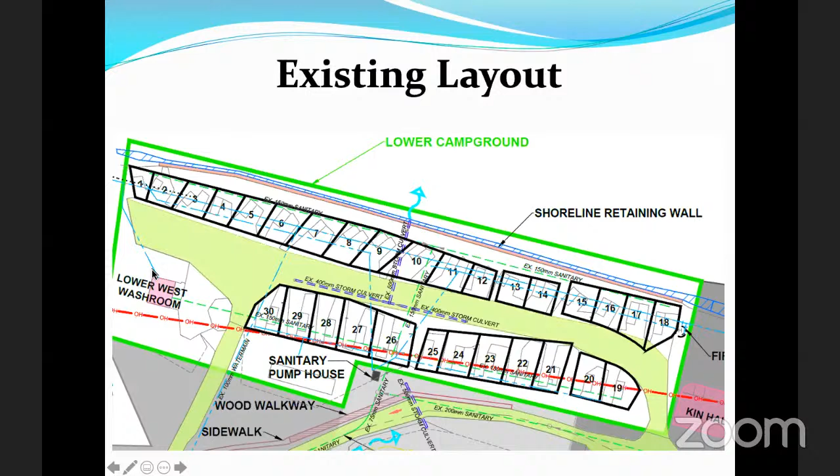I have 2 suggestions for you. One builds on the layout as recommended in the master plan study, and the other one is a far cheaper option. This is the layout recommended in the master plan update.

Derek, if you can help me out, the front row of waterfront camping has been moved back and it's shown by brown rectangles. There's 15 sites shown back. The access road, just below that, in gray asphalt, has been relocated a little to the south, thereby eliminating all but 2 sites of the back row. Derek, there's two sites on the left side there, point those out. The washroom is removed as well.

What the report does not state is any indication for the green space that is to become the area between the water and the relocated campsites. There's a considerable area to the west side, that's the left side of this slide, between the 15 new sites and the waterfront.

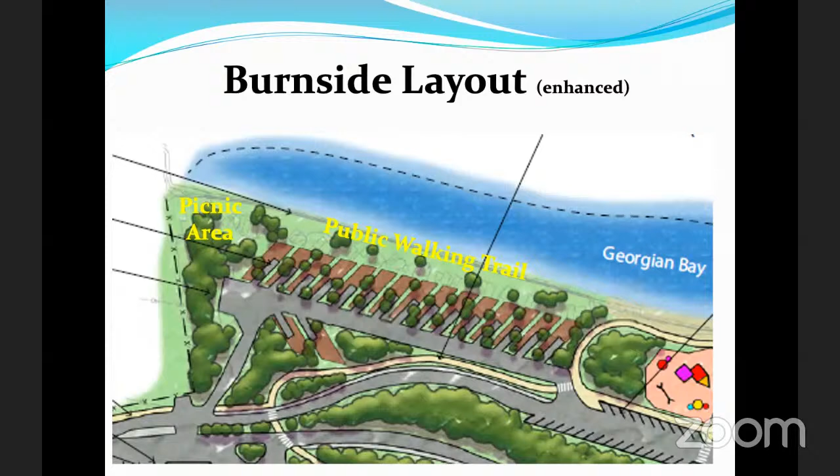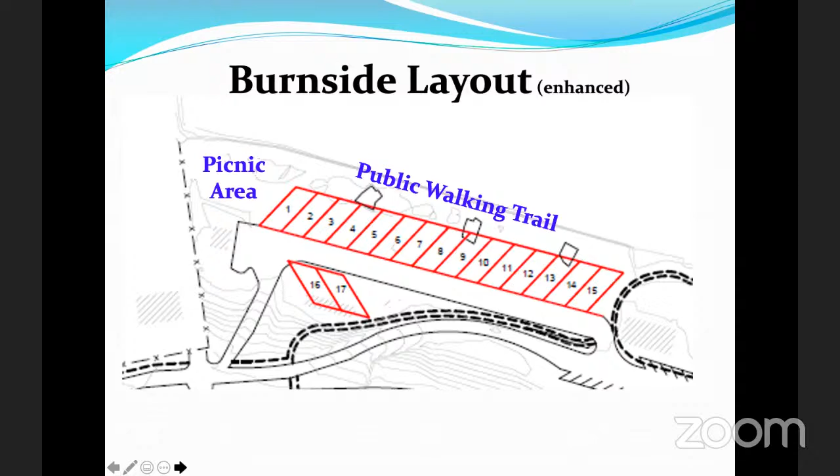This is the same slide as the previous, but most of the color has been turned off to give you a little different relationship. The red is the relocated sites, all 17 of them, and the spaces for the passive park features such as a walking trail or a picnic area.

This is slide 9, the existing layout of the lower campground, and it's a far cheaper option. I've used it as the base of the slide, removed sites 1 to 18. You can still see them in low intensity below the green. There's a picnic area or playground to the west end, the left side, and there's a trail and passive park feature between the existing road and the waterfront.

Sites 19 to 30 remain, but they should be realigned to better suit RVs. I've also left the lower washroom in because I think it could serve a function for the day users or the campsite people. So this would permit a fairly large area of green space.

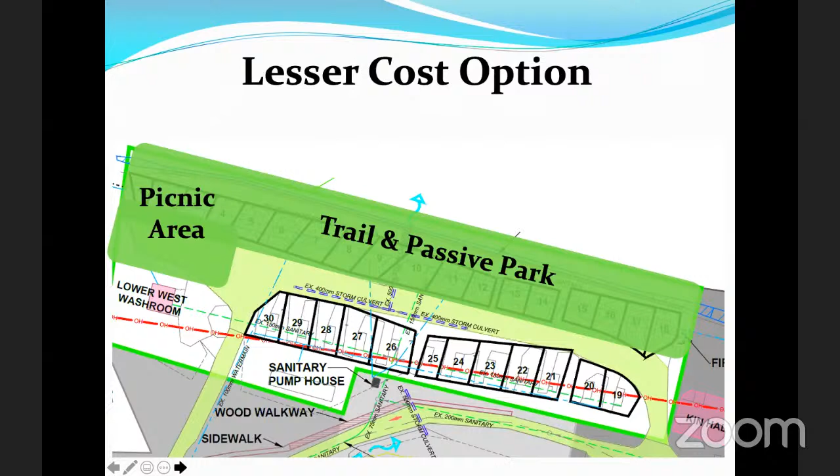Derek, next slide. In text, that cheaper option is simply: remove sites 1 to 18, adjust 19 to 30 sites to suit the needs for tents and RVs. I emphasize tents because I believe tents aren't currently permitted in the lower campground during the summer months, and I think that's discriminatory. Some room should be made for tents.

Retain the existing waterfront trail, grass sites 1 to 18 on the west end, install a few benches, and put back the picnic tables that were removed from sites 1 to 18 for the general public to use as day use. Derek, next slide. This is what it could look like.

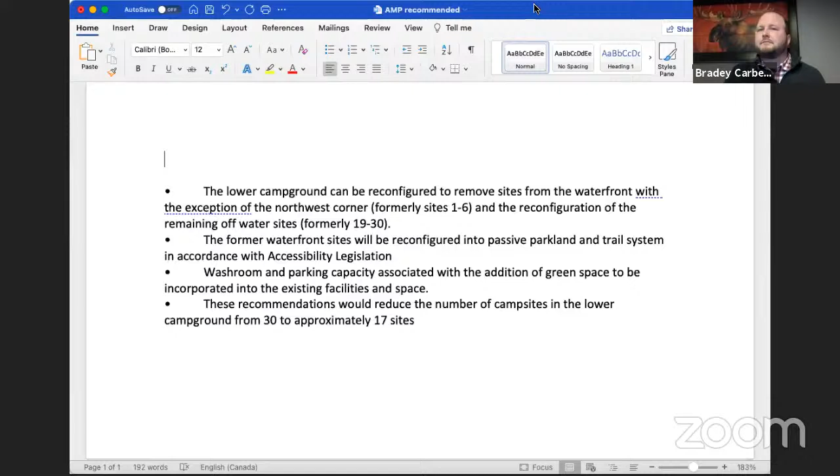Okay, I guess I'm just wondering why we're even mentioning it, because in Burnside's four key recommendations, washrooms weren't really part of it, it was more about site layout. Oh, actually, that's not true. Sorry, never mind, now I'm just looking at it again. Okay, all right.

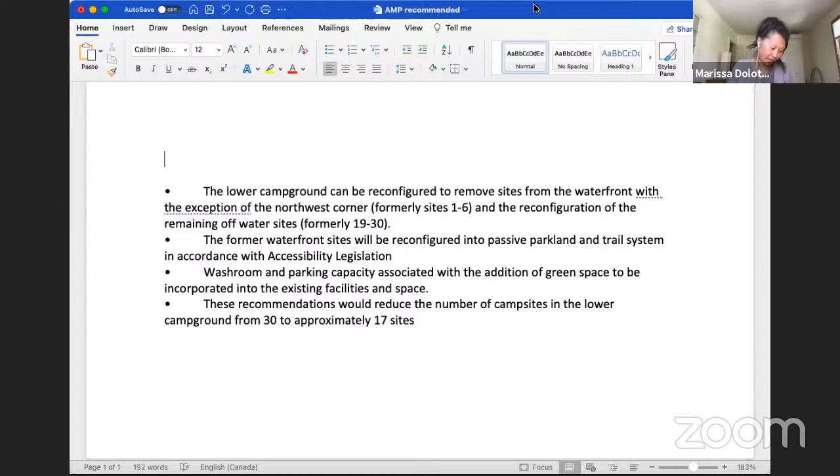And that doesn't change. Okay, did anyone have any questions, comments? Yes, Annalee. I'm recalling at the last meeting we talked with the delegates about concern over tree loss down in this lower campground, and I'm wondering if it would make sense, Bradey, to also have a recommendation to address the tree loss, so either a woodlot management plan in this area—it might already be included elsewhere in the master plan—but even specifically targeting this area for a succession plan.

So just a question. I think that's a good point, because I know AMP was—that was a big thing for them. I think it's in there. Yeah, the tree management, actually, that's right. It was in their recommendation or revised wording for the lower campground.

Can we add that back in? Does everyone see that? Tree management in the lower campground should be the same as for the rest of the park. They should be managed by professional arborists to ensure a healthy forest canopy. Healthy mature trees should not be removed to provide for larger campsites. So that's what they had added in.

Great point, Annalee. Yes, Bradey. Yes, Madam Chair, and through you to Annalee, that was the next bullet point I was going to bring up after we addressed these four. But I know we discussed this at the last meeting, and I think you guys chose to add it in. The woodland and trees for the entire park are dealt with through a park-wide recommendation and not specific to those four items.

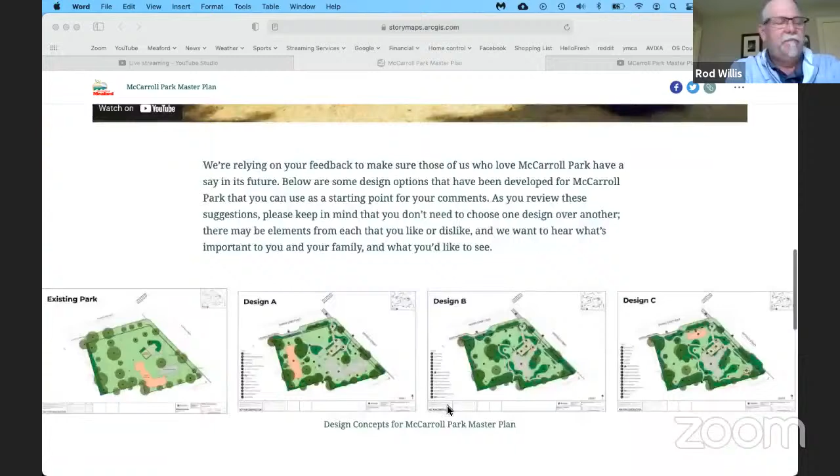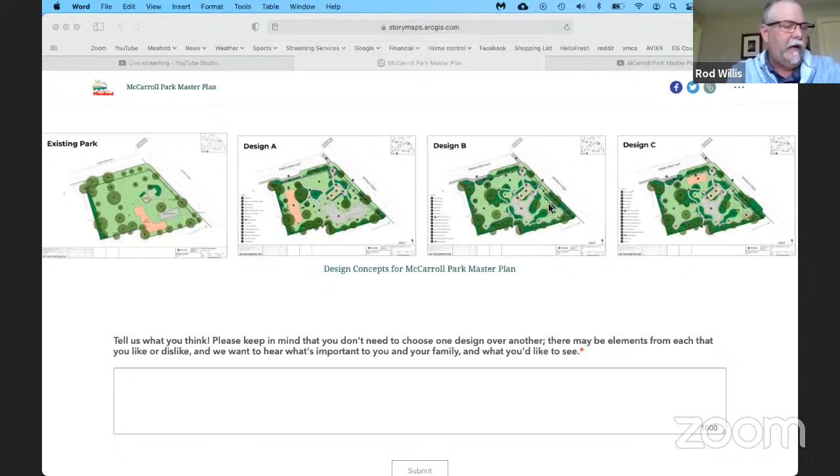Because at the end of the day, the most important part of this is getting the public input — we want their input on how we create this park. The second thing is we're going to put a video on the website that we created, and I'd like to play it for PAC here today. It just gives the history of the park, how we got there, how we obtained it. That will be posted on our website.

So what I'll do is ask Derek to just play the video. Unfortunately it's about 6 minutes long to get the entire project in, so everyone understands what's going on.

I just need to say before Derek starts, do not get enamored by the quality of acting that we have on this video and the voiceover, because you may recognize the superstar in this video, but you may not. So just be ready — I will sign autographs after. Okay, Derek.

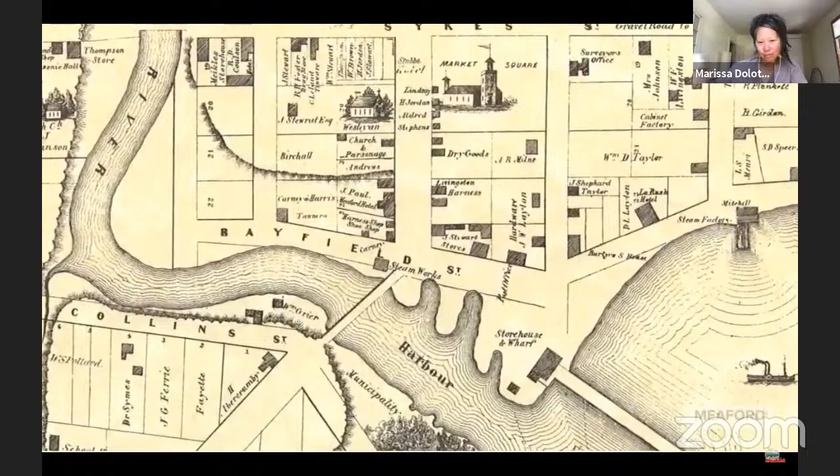The former town of Meaford had taken ownership of McCarroll Park in the 1960s. Over the years, the town of Meaford continually added new playground equipment into the park for people to enjoy. During the 1960s, a large wading pool was installed. This wading pool was a favorite spot for children to cool down on those hot summer days, as well as learn water safety under the watchful eyes of their parents, right on site.

In 1998, the Recreation Committee approved the transformation of the wading pool into a splash pad. With the financial assistance of the Apple Harvest Craft Show and the labor provided by municipal staff, the first splash pad was developed and opened in Meaford.

The washroom facility was constructed in 1980 with the assistance of the East Grey Hunters and Anglers. These washrooms are used by park visitors, people walking along Bayfield Street, and local fishermen looking to catch that trophy fish. These washrooms were reconditioned in 2018 to modernize them to accessibility standards.

Over the years, many different service clubs and local businesses contributed to the upgrades of the playground equipment. The Meaford Kiwanis Club made a $15,000 donation to purchase and install the large blue climbing unit located behind the splash pad today. Local businesses such as the former Muxlow's Pharmacy donated money to provide new swings, slides, and even the McCarroll family had set up a trust fund with the municipality to assist the purchase of new picnic tables and receptacles. Today, with its prime location, playgrounds, mature trees, and splash pad, McCarroll Park is one of the most popular parks in Meaford.

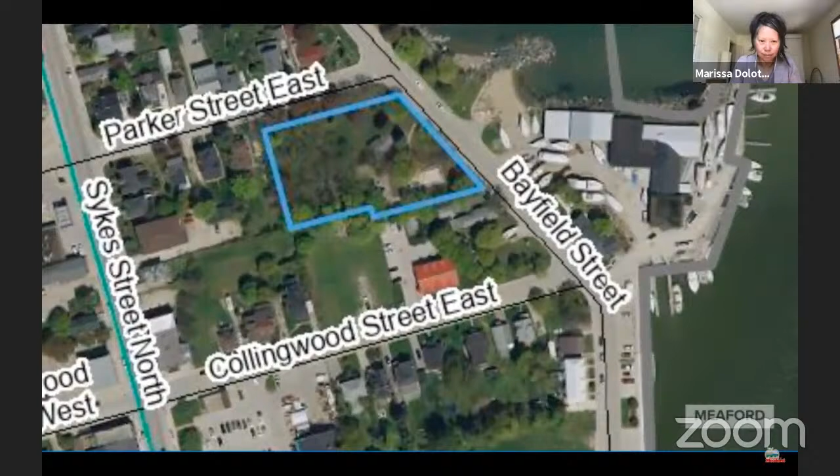Meaford Council has directed staff to prepare a new overall master plan for McCarroll Park to ensure it continues to be maintained and improved for future generations to enjoy. As the current equipment and infrastructure reaches the end of its useful life cycle, these types of plans are necessary to ensure that staff have clear direction for future planning and development.

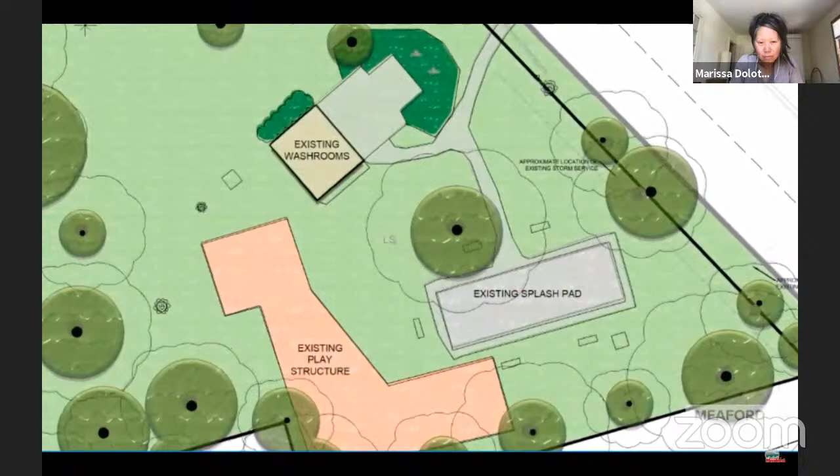This master plan will provide a preliminary layout based on your feedback, legislative requirements, and best practices for park development. These plans normally take several months to develop and several years to implement before construction begins. The plan will also include a high-level costing estimate of the new proposed layout.

With a complete plan in place, the municipality can begin to prepare for future budgets, apply for grant opportunities, and prepare fundraising efforts in order to turn this plan into reality.

We're going to rely on your feedback to make sure those of us who love McCarroll Park have a say in its future. We will provide you with design options that have been developed for McCarroll Park that you can use as a starting point for your comments. If there are additional services you would like to see in the park, please add them into any of the comment sections of the plans.

One of the legislative requirements for us to meet is accessibility standards, which is why you will see all the walkways, accessible parking spots, and new crosswalks in all of the designs. This will improve access for those utilizing strollers and assistive mobility devices to maneuver around the park and enjoy all of the amenities.

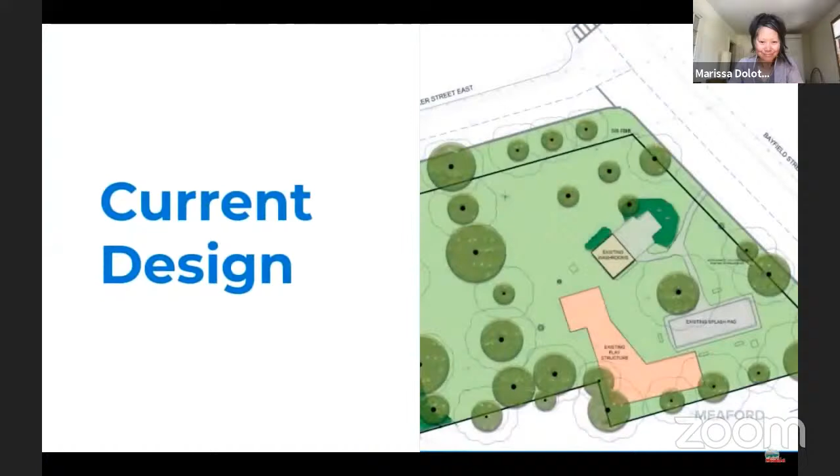This design should look pretty familiar, as it is the current layout of the park you know. As you can see, the washroom structure, splash pad, and playground area are in the lower right corner, with all the mature trees towards the left of the park.

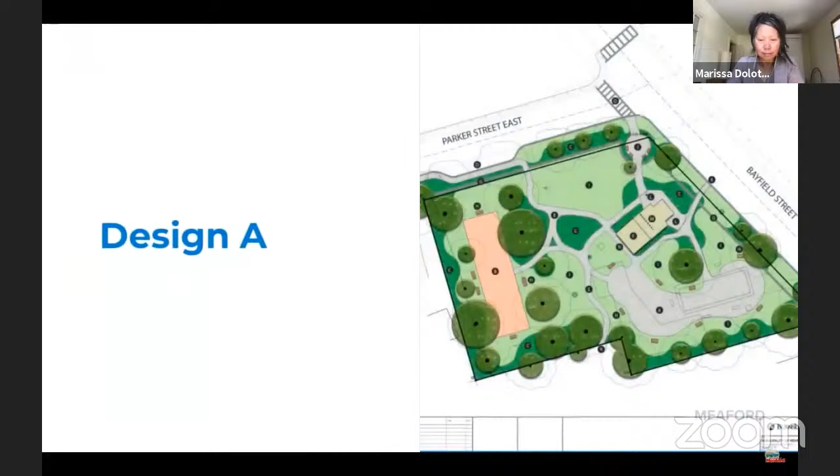In Design A, you can see the splash pad has been expanded into the lower right corner with the playground equipment moving into the treed area to the left. Walking paths have been added, connecting the splash pad, washroom, and playground area. Accessible parking spaces have been created and identified along Parker Street. There is also a new crosswalk at the intersection of Bayfield Street and Parker Street to improve access and safety for pedestrians.

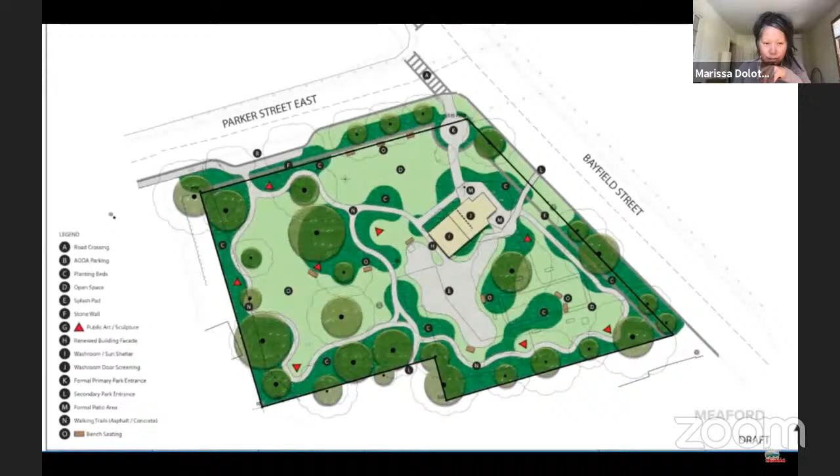In Design B, you can see the splash pad is larger, walkways have been added connecting the splash pad, washrooms, and green spaces, along with the same accessible parking spaces and crosswalk additions as Design A. In this design you'll notice a series of public art installations dotted throughout the park property. This design does not include playground equipment, but instead focuses on the splash pad and creates a beautiful open, treed, and landscaped area.

In Design C, this layout includes a larger splash pad located behind the washroom facility and a series of public art installations throughout the park. In this version, there is an added playground area along Parker Street and a small pavilion in the lower right corner for people to enjoy the views of Georgian Bay.

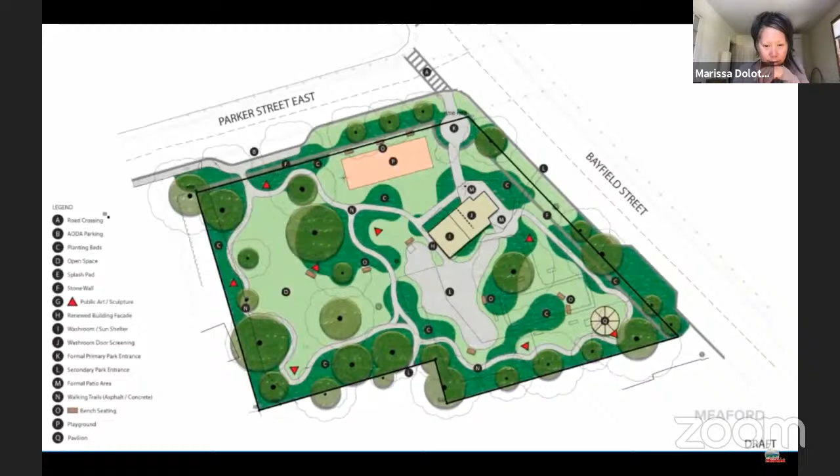As you review the designs, please keep in mind that you don't need to choose one over another. There may be elements from each of the designs that you like or dislike, but we need your input. We want to hear what's important to you and your family about McCarroll Park, and we need your comments to provide guidance to any future development of this park. Thank you for taking the time to review this and help create the new McCarroll Park.

Great, thanks Rod, nice job. So there you go. Yeah.

I just wanted everyone to keep in mind that this is a high level design. We're not into detailed design or anything else. A lot of it is, what services do we want to provide at McCarroll Park? Personally, I've been around a long time, Tom's been around a long time. There's always been playground equipment down there as long as the municipality's been in control of it, and always a swimming area. So let's enhance this, and let's make sure we get all the public feedback we can from this, to ensure that they know what they're getting in the future.

The video itself will be posted to the website. The QR code will bring you to the 4 maps for the 4 designs, and to a section for general comments.